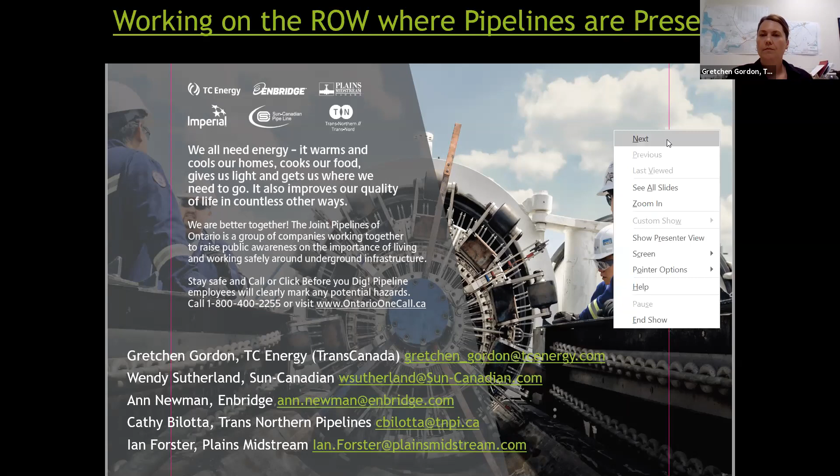So the quick outline of today's presentation: we'll go over what our public awareness programs provide, take a look at pipelines and facilities. I have a general map at the end of pipelines in Ontario, but if anyone is interested in mapping and overviews of where the lines are through your communities, those are available from a representative of the Joint Pipeline Group. We'll talk about pipeline maintenance programs and protection systems, then review the Canadian Energy Regulator requirements, talk about ground disturbances and examples of those, go into crossing documentation and crossing permissions, and end off with safe work practices, reviewing potential consequences of an incident and what to do in case of an emergency.

The Pipeline Awareness Group is dedicated to working together from different companies to ensure the safety of those living and working near our facilities. Our aim is to educate the public about the importance of calling before you dig or cross, reporting any suspicious activity near our facilities, and how to detect pipeline leaks.

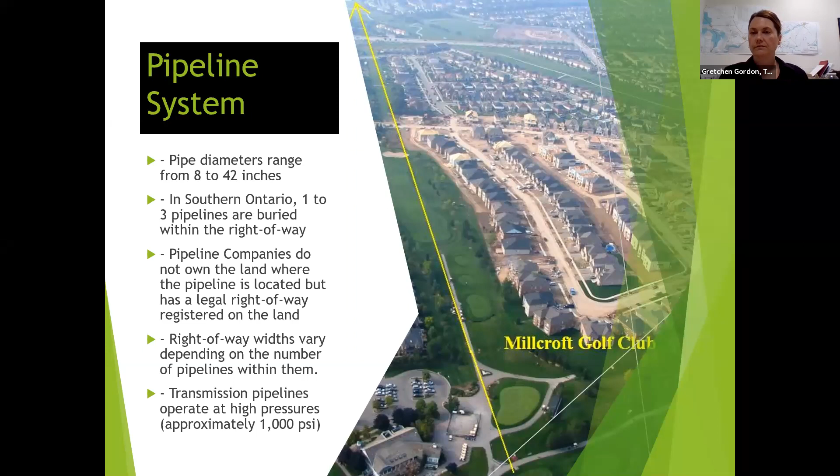Here's another example of where a pipeline is located. They're buried underground, and they could be in an area of cleared land referred to as the right-of-way, and they can be hard to see. They can run through farmers' fields, hydro corridors, private property, golf courses, green space, and in some communities they're directly in backyards.

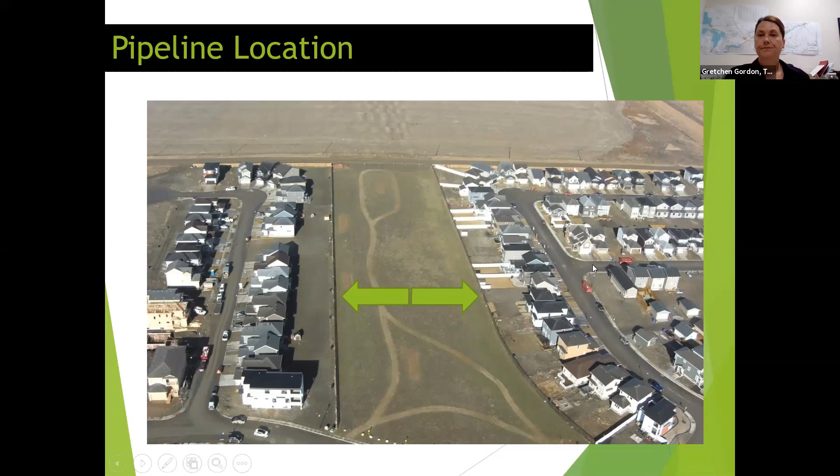You might be familiar with these markers. You'll see them in ditches and roadways, and they should be located at all road crossings, railroad crossings, and water course crossings. Some are just warnings telling you the name of the company that owns and operates that pipeline, the emergency contact information, and what product is in that pipeline. But there are other line markers, such as aerial markers for our helicopters.

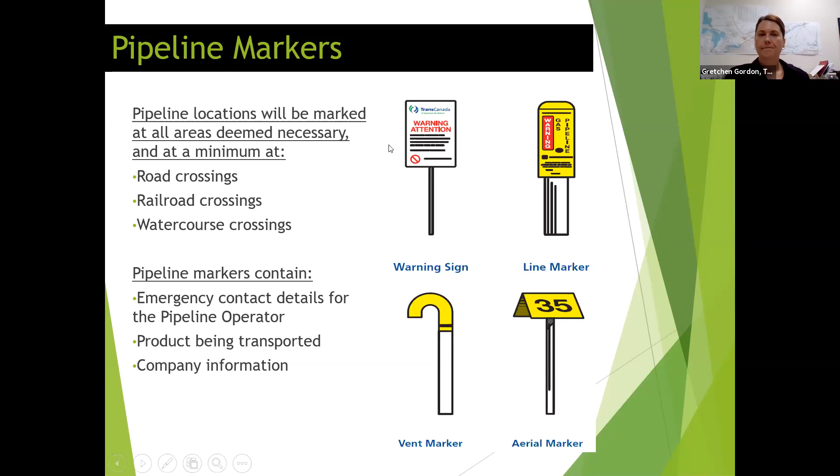Something you might come across in your community is cathodic corrosion protection systems. These are above-ground facilities that serve as a secondary system to safeguard pipeline integrity against corrosion. These systems may be located adjacent along the pipeline, and they consist of a rectifier, above ground, and buried power lines. Buried electrical cables could pose an electrocution hazard to workers, something to be aware of.

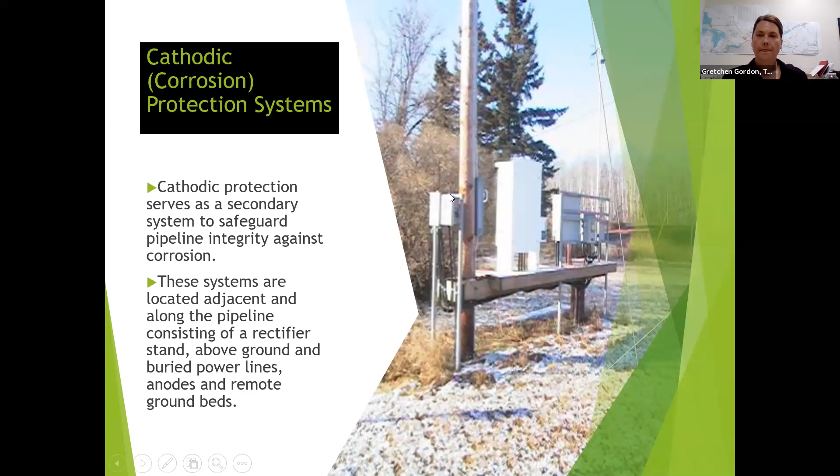Pipeline inspection gauges, which we call PIGs, go through the lines looking for any corrosions, dents, or cracks, and send us information about the line. If there's an indication of an area we need to look at, we can go do an investigative dig and excavate the line to take a look and make repairs if needed. Pipeline cathodic protection is also, as in the previous slide, another pipeline safety system.

We constantly have aerial helicopters monitoring the area. Occasionally we'll have foot patrols going out and taking a look on the right-of-way, just making sure that nobody's working there without permission. There's dumping that happens occasionally on our lines of garbage or construction materials, so we need to know about that and have it removed. So you might see our helicopters and our guys in the white trucks out there.

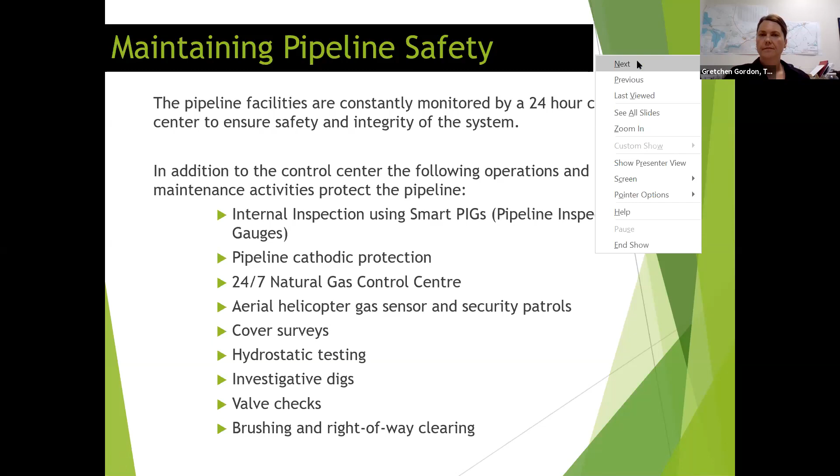Before conducting any excavation, either by hand or with machinery, or using mobile equipment outside the traveled roads, the most important thing to remember is to contact Ontario One Call. In Ontario, it's 1-800-400-2255, or you can make a locate request online.

The One Call Center will then notify any owners of buried facilities, and that extends beyond pipelines—it could be cable companies, etc. So they'll notify anybody who has anything buried there in that area, and representatives will be sent to mark our facilities with flags or paint and help you avoid damaging them. It's a free service and it could prevent accidents and injuries.

By using the One Call system, you can also avoid unnecessary, unauthorized activities that will have to be investigated by the pipeline companies and could lead to investigation by regulators, resulting in administrative penalties.

Some examples of ground disturbances are listed there. Any activity with a disturbance or displacement of soil or ground cover can be a ground disturbance under the CER Act, if it doesn't fall within the list of exclusions. There's a publication by the CER called the Pipeline Damage Prevention—I have it right here. It can be ordered from the CER's publication system, and it lists all the exclusions for ground disturbances and has a lot more information for anyone working near or on the right-of-way.

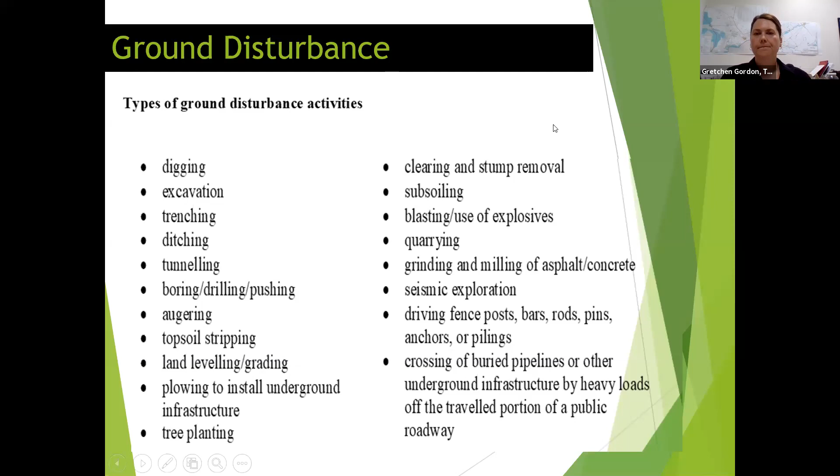So here's how it works. The process is easy: you need to contact Ontario One Call. Then Ontario One Call will notify anyone who has anything buried in the area. Each underground infrastructure owner is responsible for marking their own lines and then sending back a response to the person who contacted Ontario One Call.

Armed with that information, you can dig safely in the area that's been marked out for you. Further to that, make sure you carefully read, understand, and follow the instructions given to you by the underground buried infrastructure owner. Locators right now are taking proper precautions with COVID-19 restrictions, and there's no need for direct contact when getting a locate.

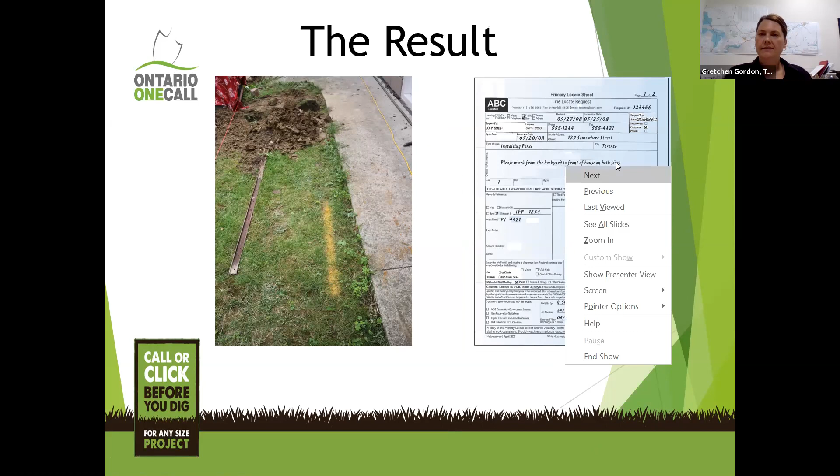Here's an example of a dig site that has been marked with paint, and an example of what the primary locate sheet you would be given looks like. You get the paperwork showing where the buried infrastructure is located. The next slide shows how that area was safely excavated. You can see there's a line right there, which they knew about and could go around in a safe fashion.

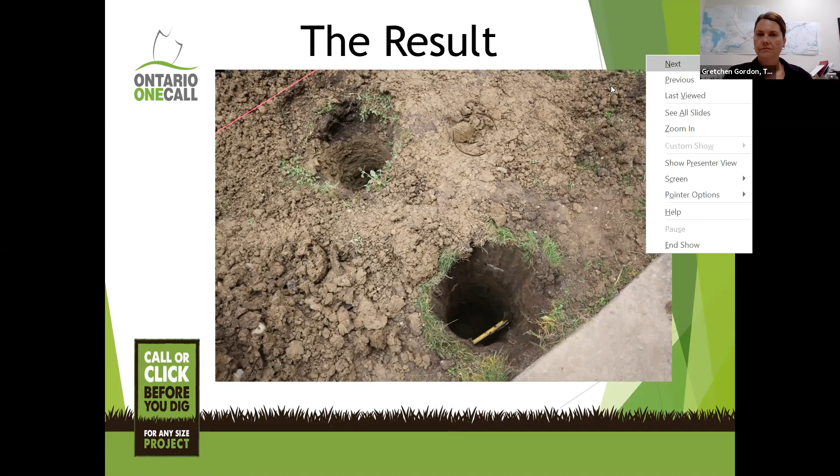One of the differences when working with transmission pipeline companies is that our regulator is the Canadian Energy Regulator. I'll just refer to it as the CER from now on. Pipeline companies are required to report any incidents that happen on our right-of-way, and there's an issues tracking system for violators of those regulations. CER has several publications available, including that pipeline damage prevention booklet I showed you.

At our booths or anywhere I go to do presentations, I bring along other information for landowners living and working near pipelines. There's a pamphlet available too that has some great information in it. The Joint Pipelines objective is really to get that information out to the public and our stakeholders, and educate violators to take the necessary steps to avoid incidents in the future and prevent any incidents from happening in the first place.

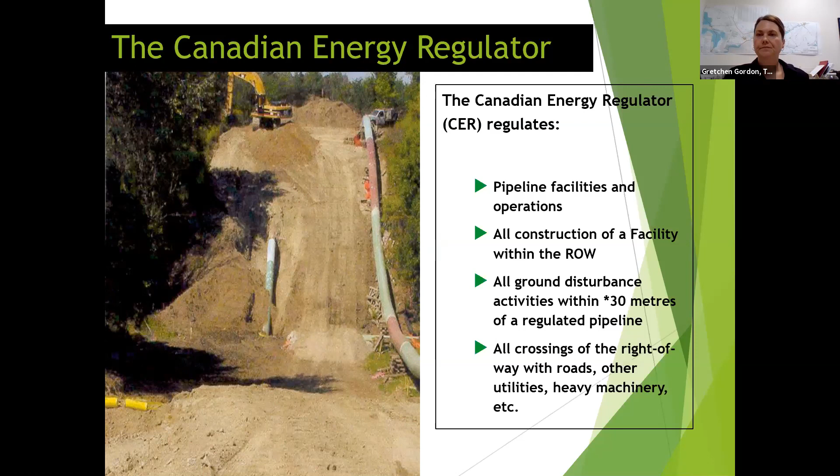No crossing of the pipeline without written approval from the pipeline company is permitted. If that happens, it is considered an unauthorized activity. You might remember in the past, if you're used to this terminology, it used to be called the safety zone. Now it's called the prescribed area, and it's 30 meters on both sides of the pipeline from the pipeline center. That's considered the prescribed area.

You may be given permission to work in the prescribed area, but without calling the one call and obtaining permission first, that would be considered an unauthorized activity. There are setbacks for building permanent or ancillary structures in this area.

After you've called Ontario One Call and it's been identified that your work is within this area, a pipeline representative will arrange to meet you on site. First they would fill out a 30-meter application to work, or a crossing application if you only need to drive over the pipeline to get to another location.

Then the locate will happen and the stakeout report will be given to you. Locates are in effect for 30 days. After that time, you'll need to apply to Ontario One Call for a relocate. Sometimes we'll come out and locate an area, but maybe another underground infrastructure company won't come out in time to meet that 30-day cutoff, and so then you would have to ask for a relocate.

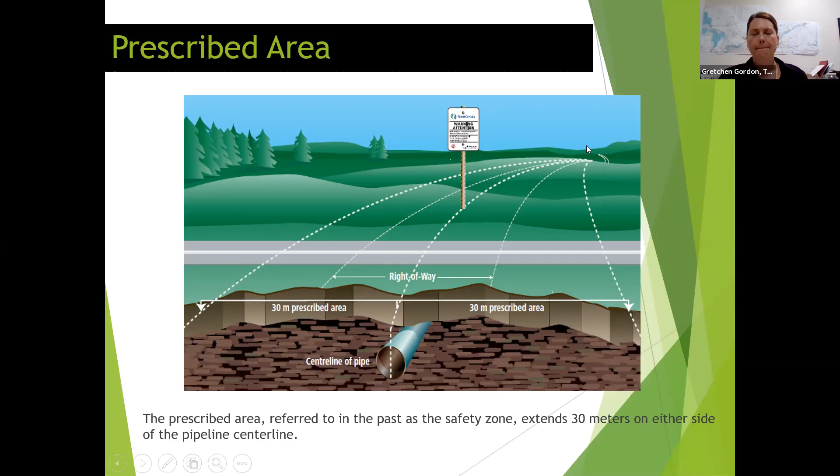Pipeline crossings and working on the pipeline are within the prescribed area. The difference with working with transmission pipeline companies, and I think this is the major point that gets missed sometimes with working with us, is that unique to the CER regulations, a pipeline representative must be on site for excavation within the right-of-way. So we have to be contacted before digging begins.

Once you have an approved crossing or an approved application to work on or within the prescribed area, you must notify the pipeline companies a minimum of 5 days before you actually start the work. It's only 3 days for the federally regulated pipelines, but you won't know which ones are federally regulated or not, so just keep that 5 days in mind before you start work, so that we can make plans to have staff on site and ensure that the pipelines are properly staked.

When working on the right-of-way, you're responsible for knowing where underground facilities are located before you start work. It's your responsibility to know and verify that the necessary calls have been made to locate the underground facilities.

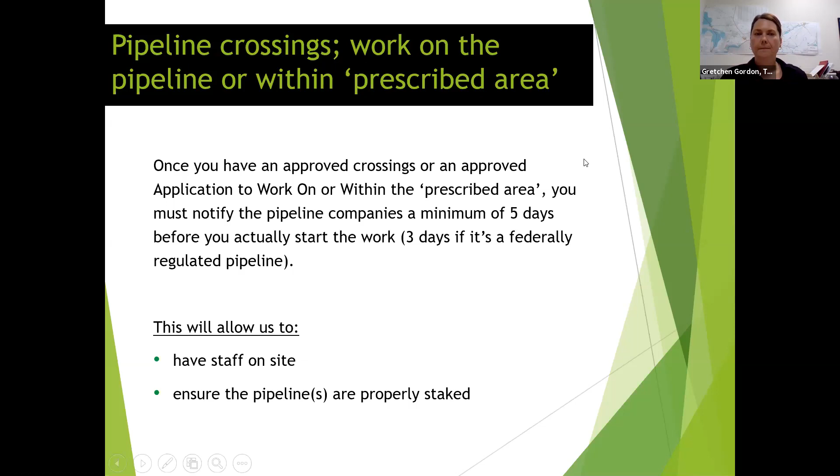Calling before you cross - this activity also requires a one call. Even if you're not digging, even if you're not excavating, the one call will be able to notify us, and then we can determine if your activity requires a crossing agreement. So crossing the pipeline includes doing so with skidders, dozers, any kind of equipment like that.

You'll be required to fill out a crossing application if it's determined that you need one, and then the pipeline companies will respond to you within 10 days of receiving this application. If additional information is requested, then additional time may be required. This is to make sure that your crossing is carried out safely and to ensure the ongoing integrity of our facilities, and make sure that you can get on with the work.

Here's a few diagrams. That's just a picture of machinery crossing the pipeline. The top right-hand picture is an unauthorized activity that happened on one of our lines, where you can see wet ground was dug up with no crossing already predetermined, causing a lot of damage and rutting. The picture on the bottom right is a designated crossing put up by the pipeline representatives.

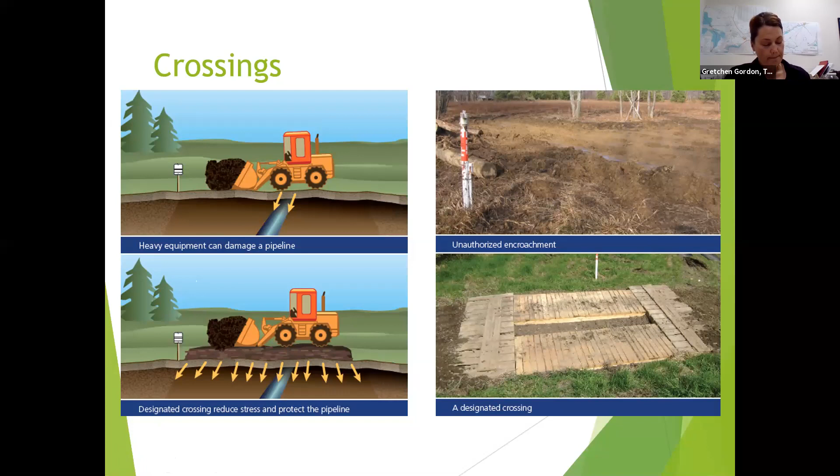It's never too early to know about development. Monitoring land use planning and development is essential due to its impact on pipeline facilities. When we go in and speak with municipalities about new projects we're implementing, we're hoping to hear about any new projects you're implementing as well. It's important to keep that communication open with us.

Early engagement is important because it could be several years for planning and engineering. Early identification enables pipeline companies to clarify expectations of a municipality or developer and possibly influence the integration of facilities into the planning and development.

After workshops were held with many organizations, guidance documents were developed into a full-fledged standard regarding development by municipalities by the Canadian Standards Association. Those were published in 2018, and that document is called the CSA Z663, Land Use Planning in the Vicinity of Pipeline Systems - a great reference document available on their website.

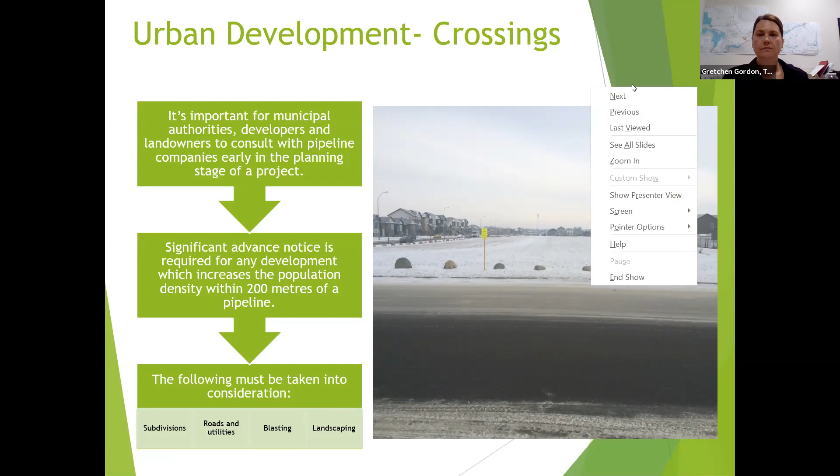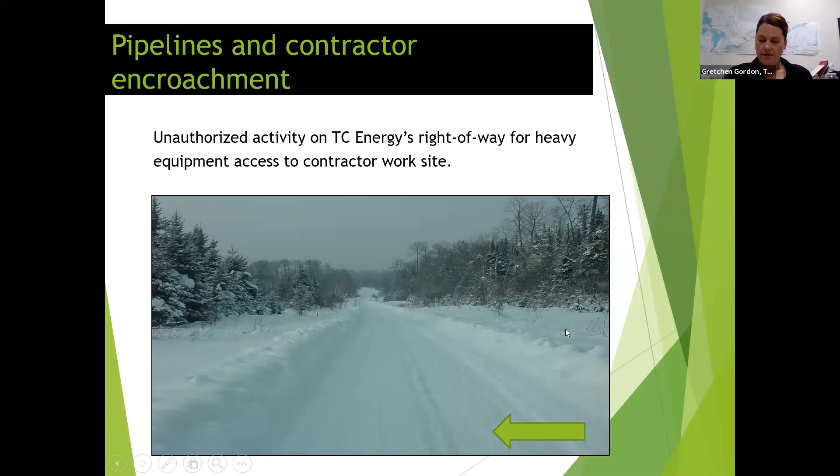This is something that happens more often. An example of an unauthorized activity was that the scope of work for this project changed. This was actually a utility company who called for a locate, did the right thing, and were working on their own right of way. Their marks were located, the marks were there, the pipeline companies came out, but after the fact they returned to site and installed a guy wire after all the markings were no longer there, thinking they remembered where the locates were marked.

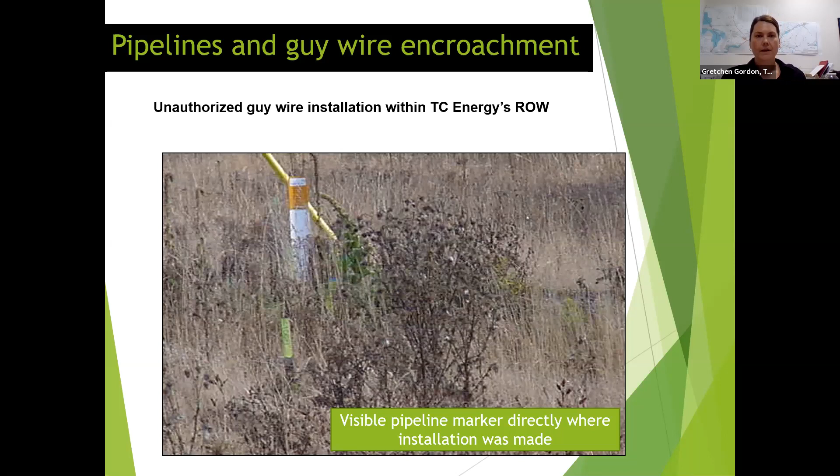Safe work practices, as part of a group that may be involved in construction or hiring others to do so. Education for all your contractors you work with and following safe work practices is so important to avoid any incidents.

Our Ontario Joint Pipeline maps, which are available to you, show transmission lines. However, there are still many distributor lines, communication lines, hydro, etc. that are not marked. So if you do hit or contact a pipeline, remember to report it immediately, even if it appears to have minor damage, and notify us before it's backfilled to keep from any further damage happening.

Besides the Canada Energy Regulator, there may also be other regulations that apply. For example, the CER has an understanding with the TSSA, and the TSSA may be called in to investigate any unauthorized activities.

Possible signs of a leak, we just wanted to make you aware of. For transmission lines, we don't have that natural odorant added into our lines that you would smell, that rotten egg smell you might be familiar with. That's added in at the distribution center, so that if there's ever a leak in a home, that smell would be present. But the transmission lines don't have that added in yet, so there may be a slight hydrocarbon smell. If there is a leak for oil, you could smell petroleum.

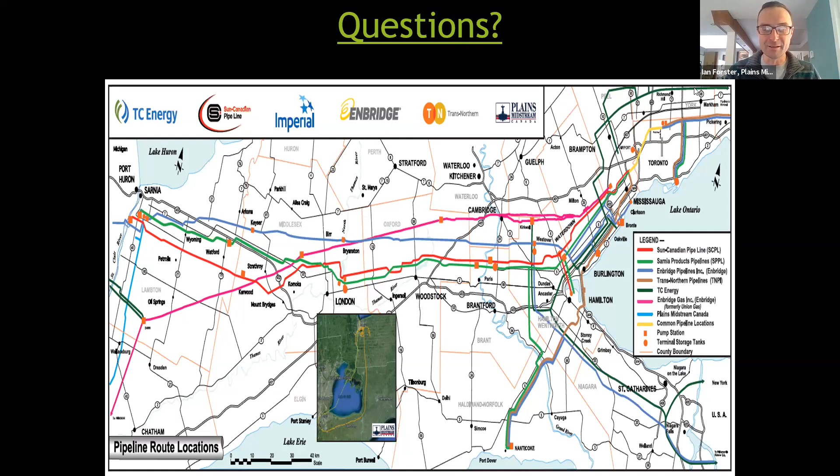And what, oh go ahead Ian. Sorry, I'm not quite sure I understand the question. Forgive me on that. The buffer zone is a 30-meter zone from the center of any existing pipeline. I think they're talking about setbacks, Ian. Okay, I'm not sure exactly, but I was just reading what the question stated as written.

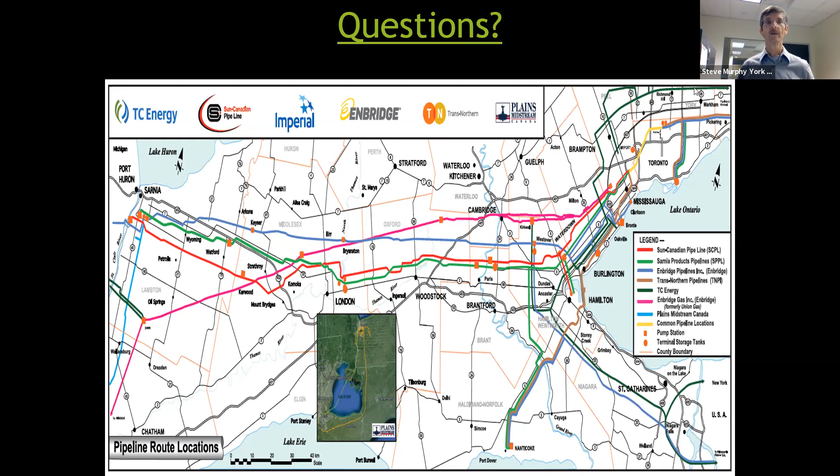On that, I don't believe I've received any more, so I'd like to stop the Q&A now and thank all the panelists for your answers and participating in that. At this time, I would like to thank Gretchen for the presentation and sharing all that very critical information when you have to do work near pipelines. I know I've been involved with some projects where no early consultation has created problems and delays, so it's really critical to keep those lines of conversation open with the pipeline companies.